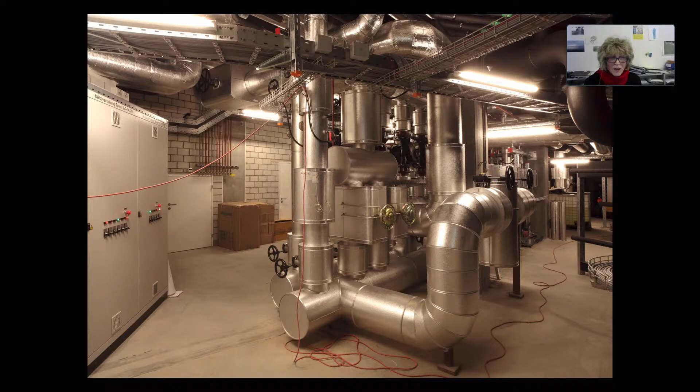For most of us, the image of these substances and types of energy manifests itself primarily through their appliances, containers, screens, and control equipment, pipes, ducts, tanks, lines, switches, intakes, and exhausts. We place them in the basement. We make them disappear in recesses. We cover them up, bury them in concrete, because their expression seems too arbitrary, too technical to us, and of course, most important, for reasons of safety.

Even less do we have a grasp of the carbon footprint that our buildings leave in the atmosphere, or more generally, our way of life. 40% of worldwide CO2 emissions are presumably caused by buildings and households for heating, cooling, hot water, electric appliances, etc. So my idea of architecture as a marriage between the Earth's crust and the atmosphere looks now less romantic, and the partnership has gone seriously out of balance.

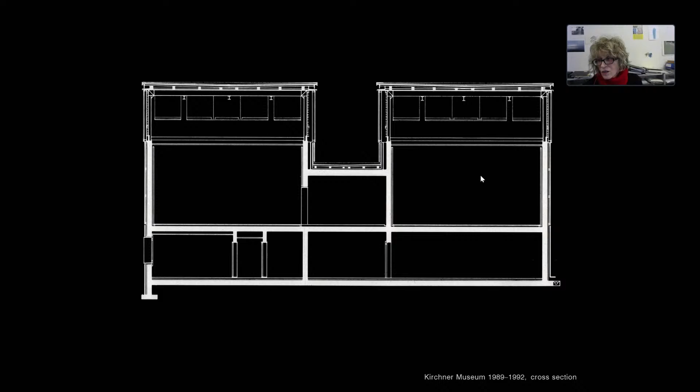We wanted to feature the new climatic building requirements then, and therefore revealed the construction of the wall, so the insulation panels on the opaque concrete walls of the exhibition rooms show through the etched glass. You can see this here. But the insulation, which was state of the art at the time, would now be twice as thick.

But for the first time, we used waste glass taken out of the recycling process on the roofs instead of the usual gravel. The recycling of used glass in Switzerland was then introduced in the late 80s, and it's still sparkling when you look on Google Earth at the museum.

A mostly closed, well-insulated building with a robust envelope and few openings for skylights and windows are the features to guarantee low maintenance and low operating costs for the museum Liner in Appenzell, because it's a private foundation and gets no subsidies. Today it's called Kunstmuseum Appenzell.

All the exhibition rooms are lit by north-facing skylights in order to avoid direct sunlight on the works of art. But the skylight in the entry space, the gathering space, is directed towards south, looks south.

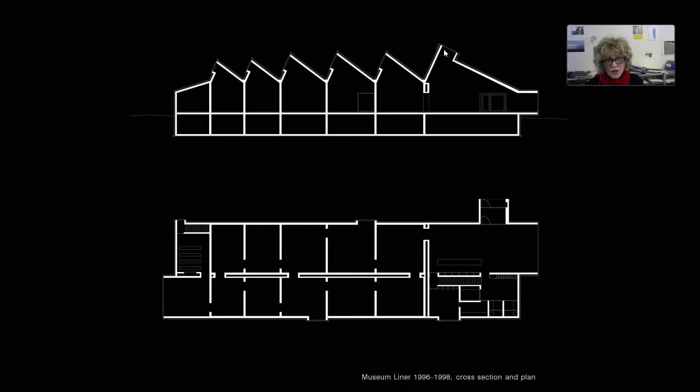The walls are made of load-bearing and insulated, aerated concrete blocks. This white material we call Ytong, the material you build single detached family houses with, cheap material, insulating. Additionally, they have ventilated exterior insulation clad with sheets of stainless steel.

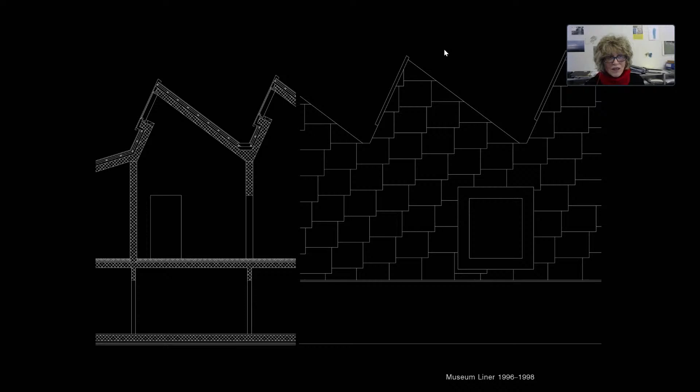It was the first building that we equipped with a brine water heat pump, and the parameters were really great at their time, but they're still good today. The total energy consumption of the building for heating, cooling, humidity regulation, lighting, hot water, and all appliances in the museum is only about 50 kilowatt hour per square meter a year.

But what about the embodied energy invested in the robust stainless steel facade? Yes, hopefully it may be written off, maybe amortized ecologically over many decades.

The subsidized housing development Brunnenhof was the first project where we met the Swiss sustainable building standard Minergie Eco. 2 buildings with 5 to 6 stories contain a total of 75 spacious apartments for families with 3 or more children.

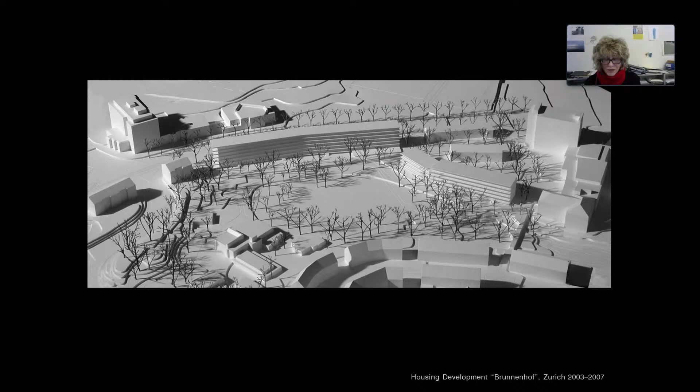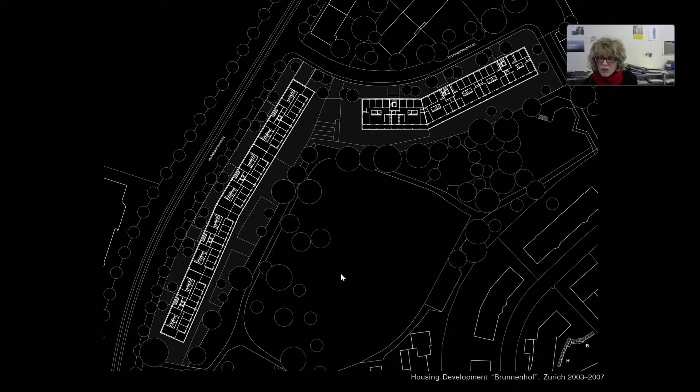The location is interesting and unusual. The back of the project faces a noisy street to the west, but the front looks into a public park with a small zoo. Only the kitchen faces the street, whereas all the other rooms face the park. The most luxurious space is probably a balcony which runs the length of the facade facing the park.

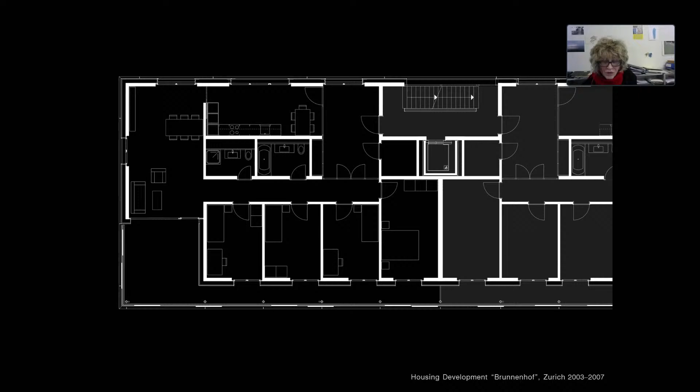Sliding panels of transparent and translucent glass serve as wind and sun protection, and they also screen the view from outside. They create a lively impression, together with the plants, furniture, toys, and laundry of the occupants.

The exterior cladding of opaque glass conceals a 20 centimeter thick layer of insulation, rock wool, and brick, and recycled concrete was used for the load-bearing structure.

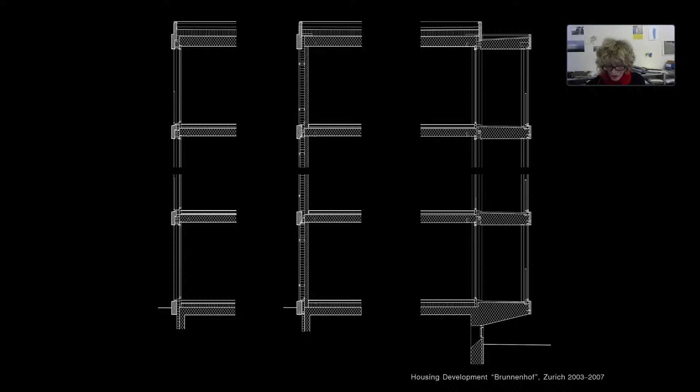District heating and warm water is provided by the nearby waste incineration plant. According to calculations, the building should consume only 25 kilowatt hours per square meter per year for heating alone.

The Swiss Museum of Transport in Lucerne welcomes its visitors with this new iridescent building, whose glass facades veil shiny scrap metal in the form of rims, propellers, ship screws, cogs. Just a few are from the museum collection. Most were bound for the scrapyard.

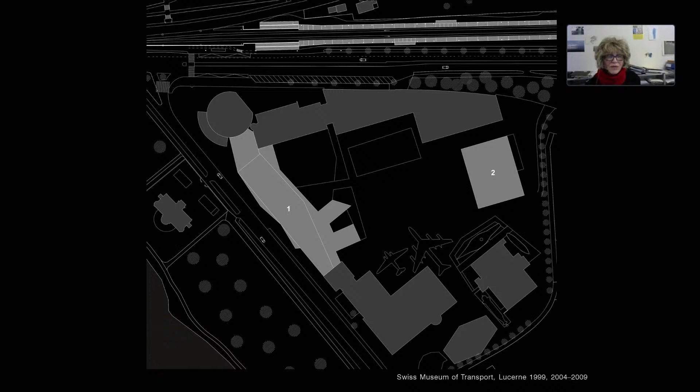This was building 1. Building 2. We considered also for building 2, for the road transport hall, using scrap metal. We studied the recycling of automobiles in Switzerland. First, the wrecks are pressed for efficient transportation. We proposed using these flattened bodies as cladding for the new hall.

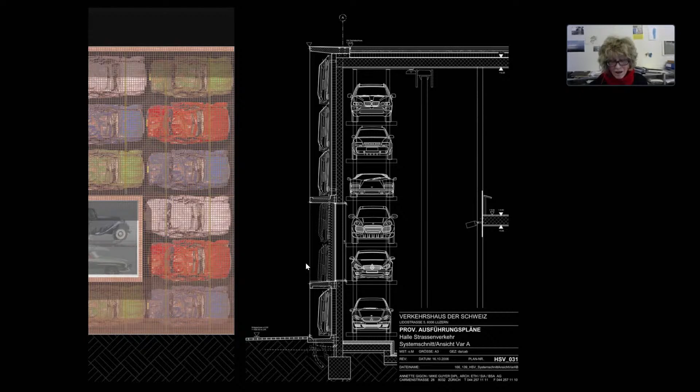We liked the juxtaposition: on the inside, the well-groomed vintage cars; on the outside, the wrecks that would be left to the ravages of time. The client approved the solution, but the automotive industry, as prospective sponsors, did not.

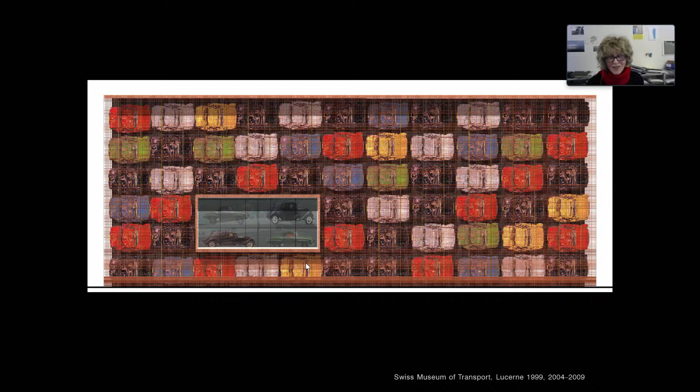A different solution had to be found. Road signs are also a source of scrap metal. We ended up covering the facades with used and new traffic signage, with duplicated ones, and also with some misleading signs of our own invention. We reversed the used signs that face the surroundings.

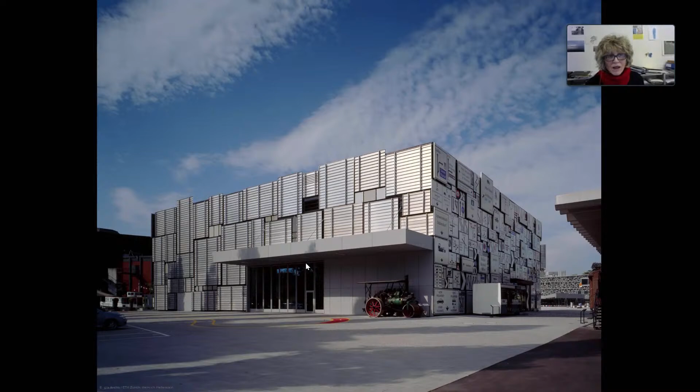The road transport hall was our first building to be equipped with a photovoltaic system.

A high-rise, like the Prime Tower office building in Zurich, has considerable urban potential. It can accentuate an emerging district like Zurich West. In spite of its height, it can communicate with the neighbors, with older industrial structures as well as new buildings.

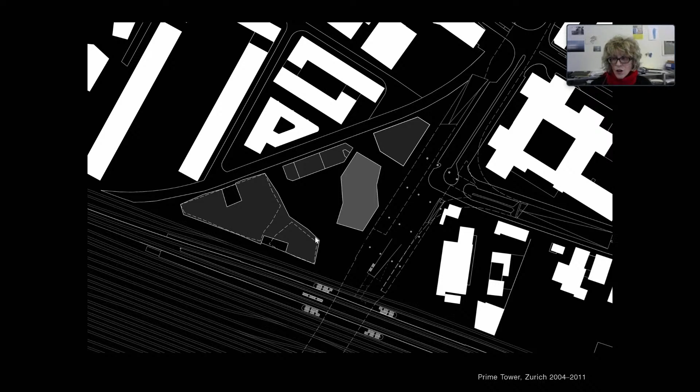By its placement and height, it can create public open spaces like the Marktplatz next to Hardbrücke station. This is the Marktplatz, and this is Hardbrücke station. And it can offer a view of the city from the public restaurant at the top.

It can play with the light and changes in appearance depending on the weather, especially when its facades are made of glass.

But what does a high-rise, notably a fully glazed one, have to do with ecology? Well, thanks to certain properties and measures, the building has in fact been awarded a number of eco-labels like Minergie, LEED Gold, etc.

And this is why the office high-rise has a large floor area. It's very compact, with 1,400 to 1,600 square meters per story. The total floor area is 3 times as much as the corresponding envelope surface.

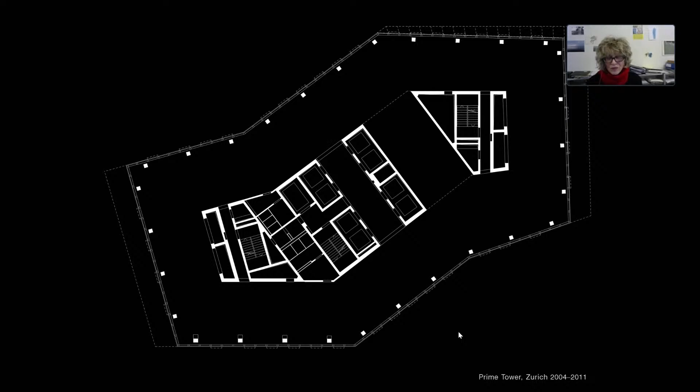And the facade panels consist of insulating triple glazing with low U value, medium light transmittance, and medium G value. The latter is further improved by inner, automatically controlled blinds.

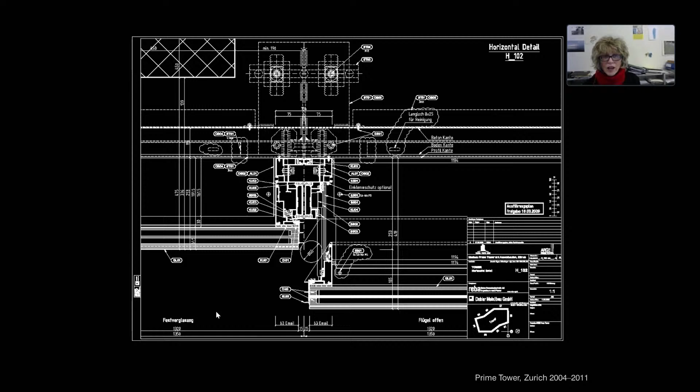And for the well-being of the occupants, every other window can be individually opened up to 7 centimeters during spring and autumn to allow fresh air, a ventilation function that can be centrally overridden when outside temperatures are too high or too low.

But is this user-friendly operating option maybe responsible for the great variations in heating and cooling demand among different tenants?

For the heating, the building uses mainly groundwater and district heating, only to cover the peak demands. And to its ecological credit, the building provides only 150 parking spaces for the 2,000 employees working there, because it's located next to Hardbrücke train station, as we heard.

But if the building had been executed as we had proposed it in the competition, with a ventilated double layer glass facade, would consumption values be better, or would we just see a higher share of embodied energy? Today, at least 20 kilowatt hours per square meter a year are needed for heating, and about twice as much for cooling. So around 60 kilowatt hours per square meter a year at minimum, which is not bad, but yeah.

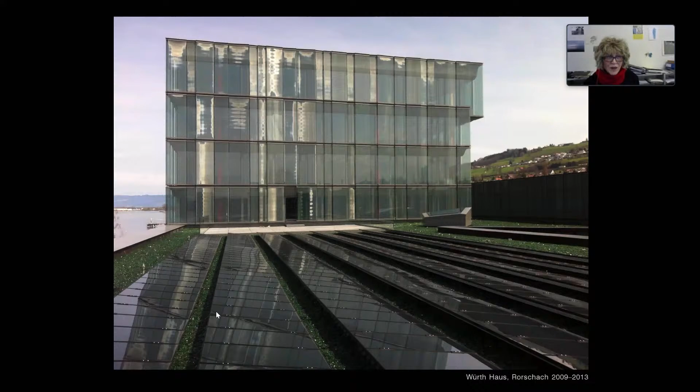This mesh reflects about 25% of sunlight without impairing the view from the inside. The panels are mounted at varying angles, allowing for ventilation of the interstice and also creating a play of light. The building not only plays with light, it also works with it: 2,000 square meters of thin film solar panels, photovoltaic panels, meet part of the electricity demand.

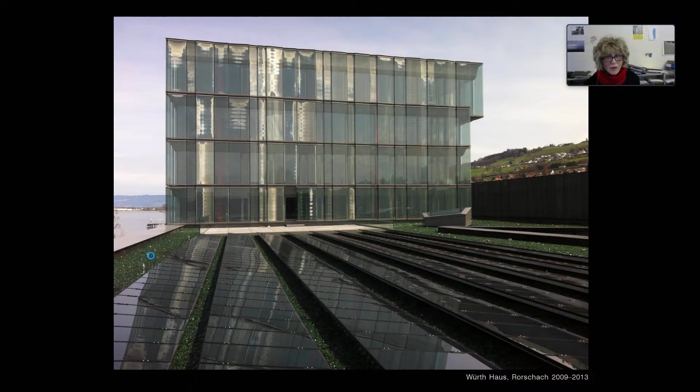Recycled glass was employed here again, green one this time. All the roof surfaces are equipped with solar panels, and the heating and cooling needs are entirely served by lake water.

And what about recent buildings? The housing complex Zollikerstraße features heating with ground source heat pump, 20 centimeter thermal insulation, triple glazing, but has large windows.

The office high-rise Andreasturm uses district heating from the waste incineration plant, parapets with 18 centimeter thermal insulation, triple glazing, and an outer glass panel, and sun blinds in the interstice, analogous to the Würth building.

The office building Claridenstrasse is heated and cooled with lake water heat pumps, supplemented with solar panels on the roof, 22 centimeter thermal insulation, triple glazing. But there are lots of windows, and for user convenience, individual operable ventilation flaps are installed that users may as well forget to close.

The residential building in Küsnacht has fewer window openings, 26 centimeter thermal insulation, but is still heated with natural gas.

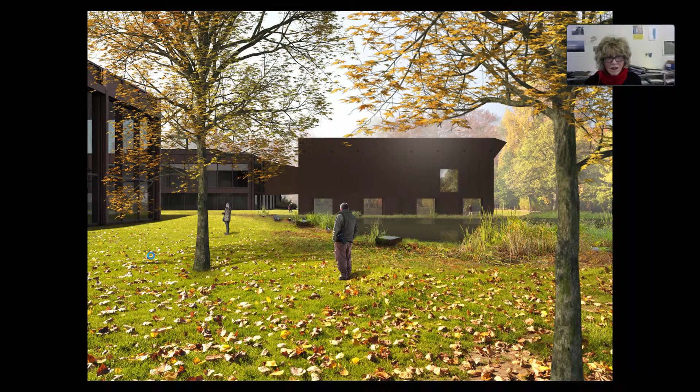It's very compact, has triple glazing, 26 centimeter thermal insulation, and is heated with district heating, but which is still produced with fossil fuel. The section with the sawtooth roof has its windows oriented towards north-northeast.

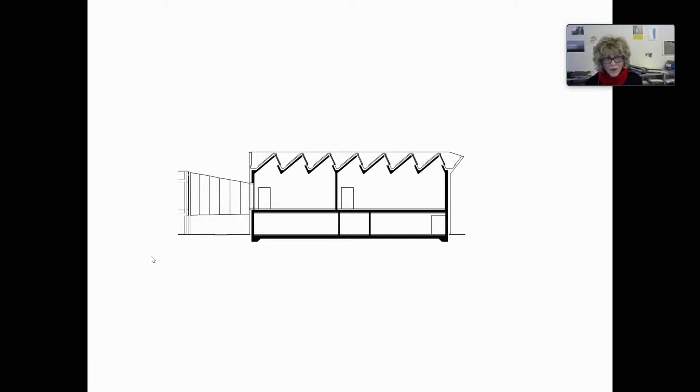On the screen, photovoltaic panels on the back of the sawtooth roof towards south-southwest were not part of the brief, not part of the program. So they will not be executed, but maybe, hopefully, in the future there will be a budget for it. Rendering from the back, the delivery entrance.

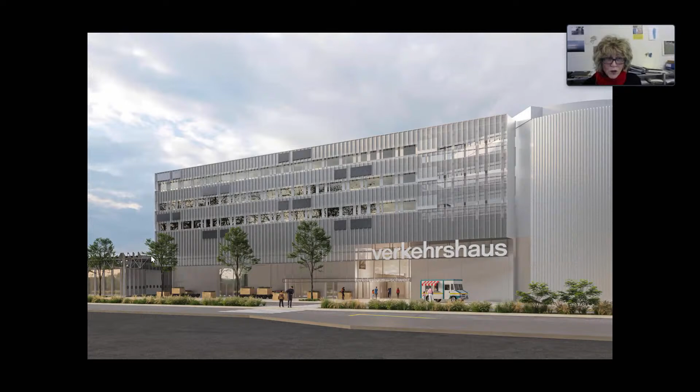A further building at the Traffic Museum Lucerne will be completed in 2023. It will serve multiple purposes, providing a second entry to the museum, huge exhibition space on the ground floor, 3 conference rooms and offices.

It will be equipped with 30 centimeter thermal insulation, with a thin perforated steel facade to absorb the street noise against the neighbors instead of reflecting it. It shows photovoltaic panels on the facades, a few only towards the north.

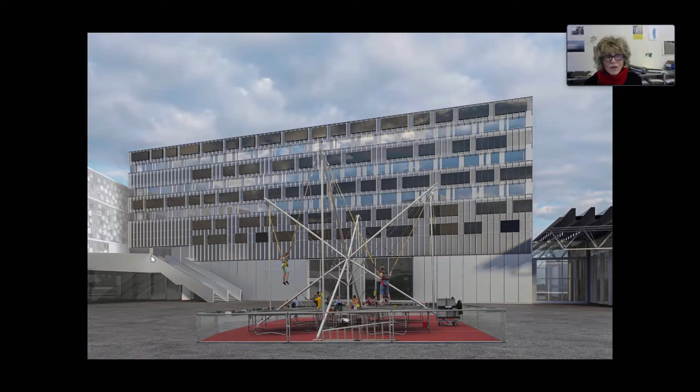More PVs, photovoltaic panels, are mounted towards the east and the south, where they can work more efficiently. Besides producing electricity, they also form a pattern on the facades, an ornament with the unpopular elements. This was a collaboration with Urs Beat Roth, an artist who helped us with this formulation of the pattern.

Of course, the roof is also packed with photovoltaic panels. Furthermore, the heating and cooling, not only for this building but for all buildings in the Traffic Museum, will be provided with a new heat pump in the basement of this new building.

But due to the difficult foundation on this terrain, and also the huge exhibition hall on the ground floor without posts, the building structure is mainly concrete.

Now, back in the exhibition in Berlin again, we showed student works from the semester 2019-2020 on the screen to the right. Let me show you the task.

During autumn semester 2019, material metabolism - in German it reads quite nicely, Stoffwechsel - the students were asked to investigate how multi-story residential buildings situated in a dense urban environment could be designed as zero energy houses, or maybe even zero emission buildings. Quite a target.

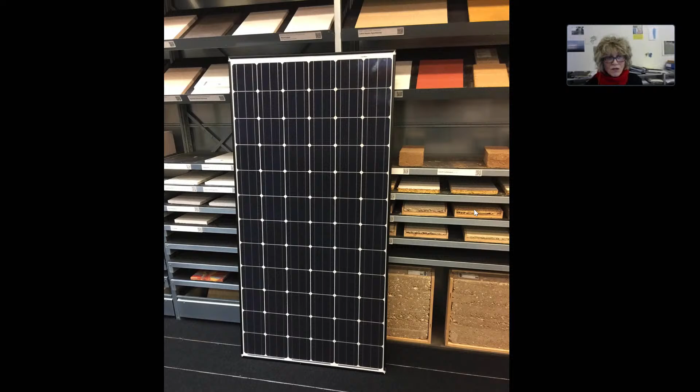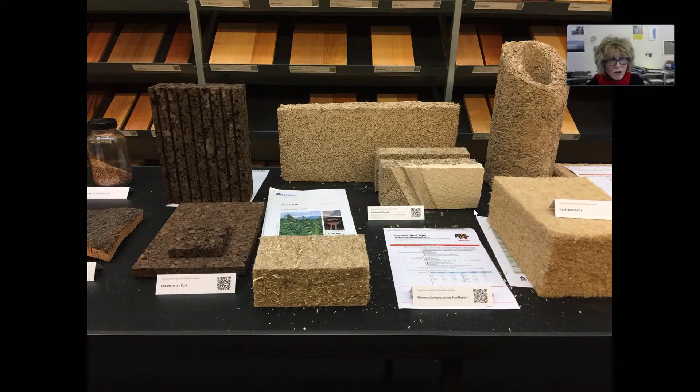The use and integration of photovoltaic panels in the design was an important issue, not an easy task and still unpopular with many architects and clients, including us. Aside from that, organic building materials like wood, hemp, and straw were to be considered as temporary carbon storage.

In the exhibition in Berlin, we showed several works. Let me pick just two of them. Both were designed for the site Birmensdorfer Straße, part of a perimeter block, which is occupied today by a setback building. Quite a nice one, I think, with access galleries on the back.

Student Moritz Dutli proposes remodeling instead of replacing the existing building. The single-room studios were developed into different duplex-type apartments. The present load-bearing structure remains largely intact. It's the black walls and the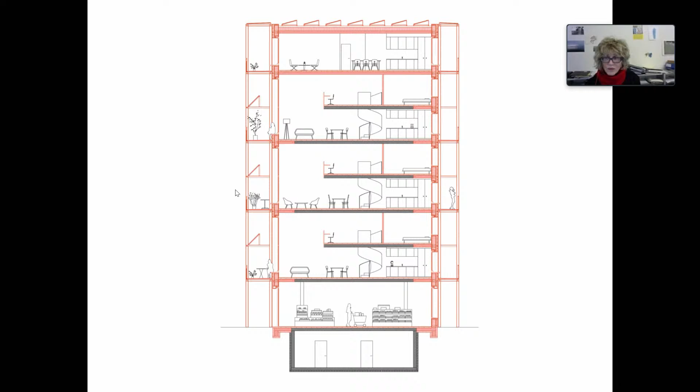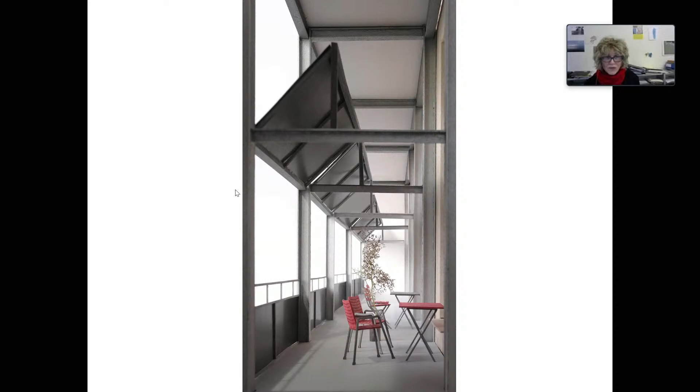and also a layer of balconies towards the street to the south. On the double high loggias, photovoltaic panels form parapets as well as sunshades, kind of brise-soleil. The added metal racks also protect the new wooden facades. And the street line of the block is re-established, although in a different way.

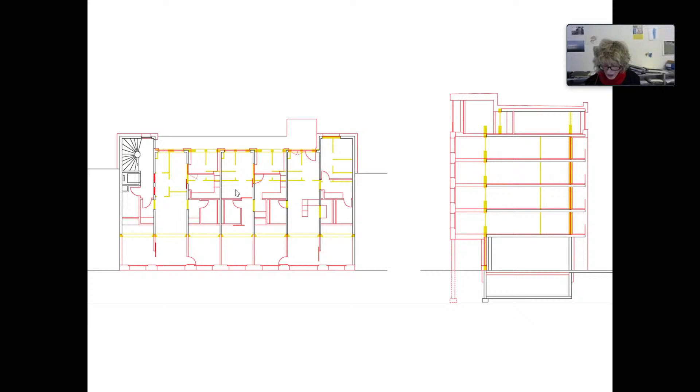The student Tim Vogel also worked on Birmensdorfer Straße. He extended the existing volume towards the street in the south. The former single-room apartments are connected to form larger units now. Facing the courtyard, they each have a small private open-air space as part of the access gallery.

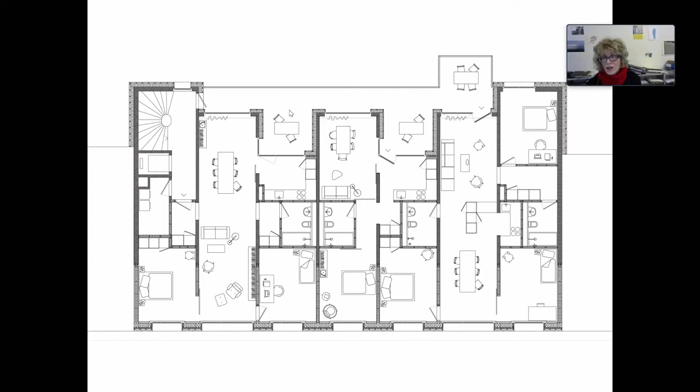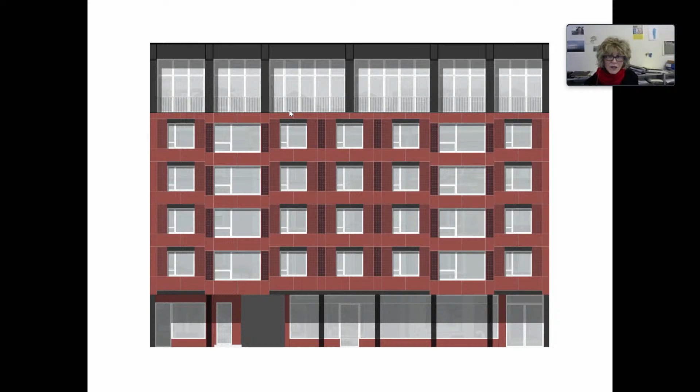The street facade to the south consists of various solar panels. Monocrystalline photovoltaic elements of different sizes receive a red color coating, but in various intensities. So dimensions and degrees of transparency are matched to generate compatible voltages so that the modules can be efficiently connected in series. This is the potential, and

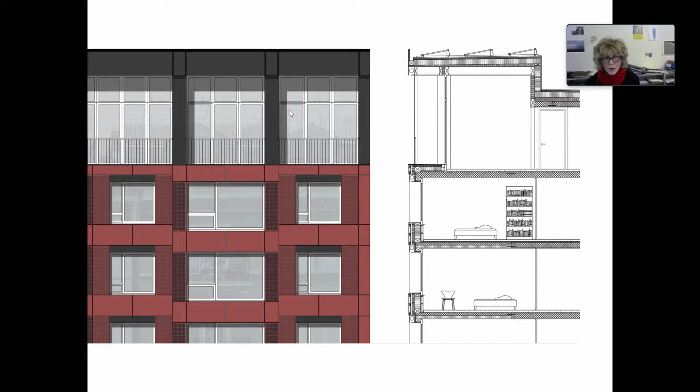looks quite nice. It forms a subtle play with these dimensions and visibility and masking of the PV elements. They make together for a very convincing facade. Kind of invention.

Well, and in the center of the exhibition on the white screen, there was room for statements, questions, and doubts. Buildings that require little or no external energy for heating or cooling, buildings that generate energy surplus, buildings that act as carbon sinks.

Yes, this is feasible today. But having learned more about this topic, we would now rather say buildings that act as carbon deposits for a while.

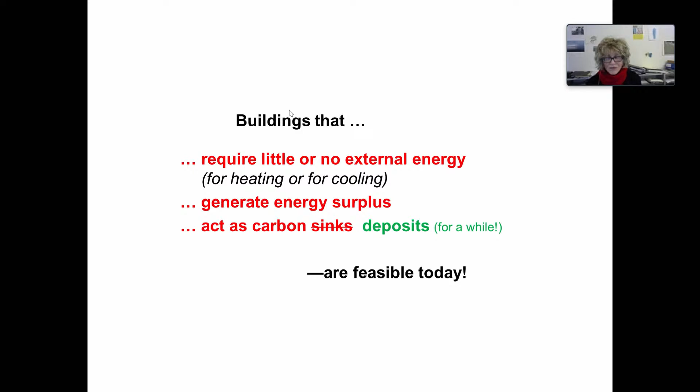Now, this is how this can be achieved: with more thermal insulation, with brine water heat pumps, with photovoltaics, solar thermal energy, with wood as construction material, not a fuel, with less window area, with recycling, upcycling, without oil, without natural gas, without coal. All that and more is well established and tested.

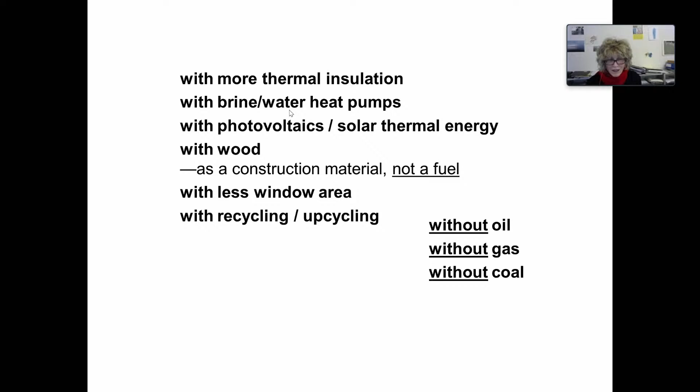But we still have questions about the balance between operational and embodied energy, about greenhouse emissions, including production, transport, and disposal across the whole life cycle. The subject is highly complex, and the greenhouse gases are invisible. Lots of data, facts, and figures are available, but dealing with them is a time-consuming Herculean task for each project.

We urgently need comparable numbers, measured values, parameters. We need clear, user-friendly tools, that is, standardized but location-sensitive greenhouse gas calculators. And yes, all of us need to increase our literacy in terms of climate and energy.

Since then, we try to dig deeper in the complex field of energy consumption and greenhouse gas emissions. Also, we try to get deeper also in the field of our beloved materials. We try to become more informed about the life cycle analysis of building materials, with unexpected results.

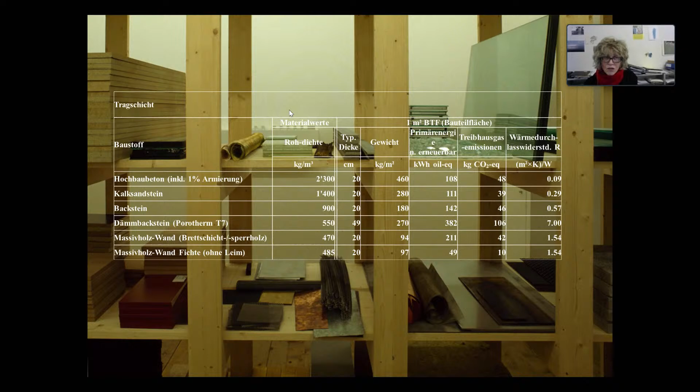In the autumn semester 2021, we repeated and expanded the 2019 concept. The preparation resulted in a 300-page reader and in a vademecum to keep useful data handy. Well, this is how they looked.

Besides the reader and the vademecum, with quite some facts and figures on energy, primary energy, embodied energy, and greenhouse data, besides talks with professionals and scientists, besides tracking current newspaper articles on the climate issue, we installed an ad hoc exhibition at the Architecture Library Material Hub at ETH.

An exhibition which showed materials in relation to the numbers—the numbers on embodied energy and greenhouse gas emissions per square meter, which students calculated.

For the design task, the students could choose one of several existing buildings in Zurich, office buildings mainly, and older than 50 years.

The buildings should not be demolished, but be converted and extended into mixed-use office buildings, housing and office buildings, a combination of both. The combined operational and embodied energy consumption, as well as the greenhouse gas emissions, should be reduced to a minimum

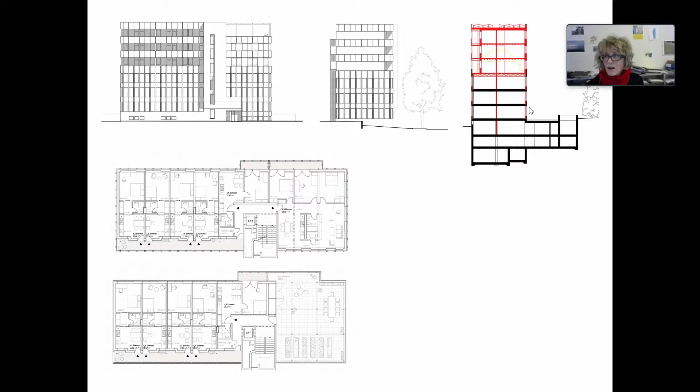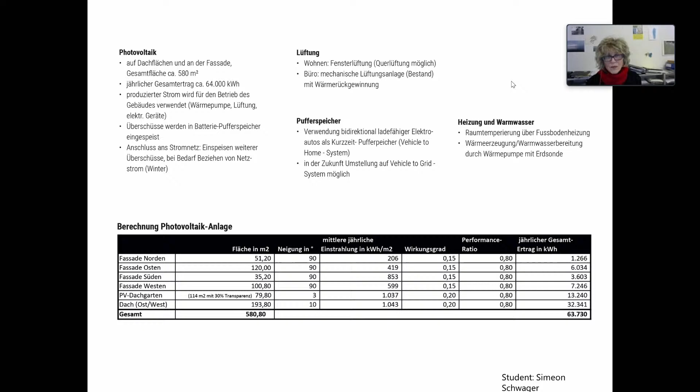The section shows the extension together with the facades and the ground plan of the apartments on top. This was the addition. All of the students calculated the energy yields of the photovoltaic system, the future demand of operational energy for heating, warm water, and electricity, in comparison with the photovoltaic energy yields and the invested embodied energy.

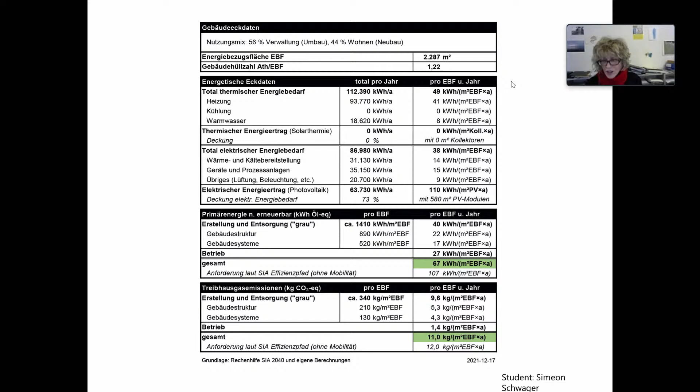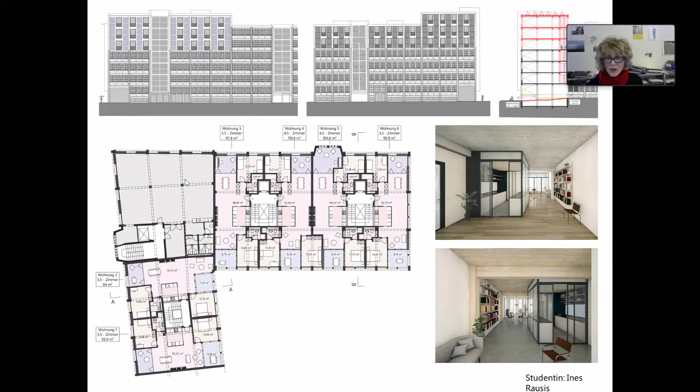A former warehouse on Badener Straße, today used as an office building, was to be transformed into a skeleton building. The student Ines Rausis added 2 to 3 floors and used photovoltaics on the facades. The floor plan shows new staircases to access the 3 new apartments. Only the northern corner towards the street, where the offices were maintained, was kept, along with the staircase.

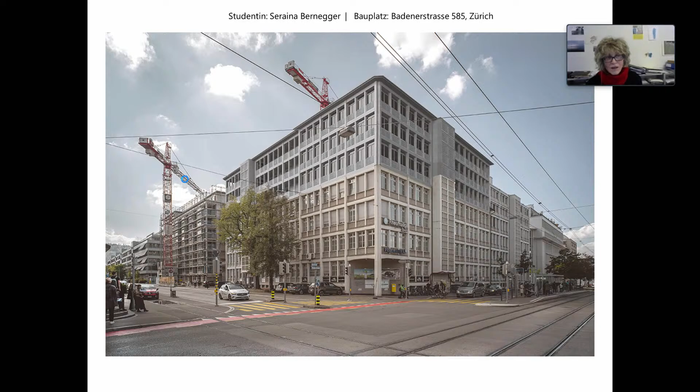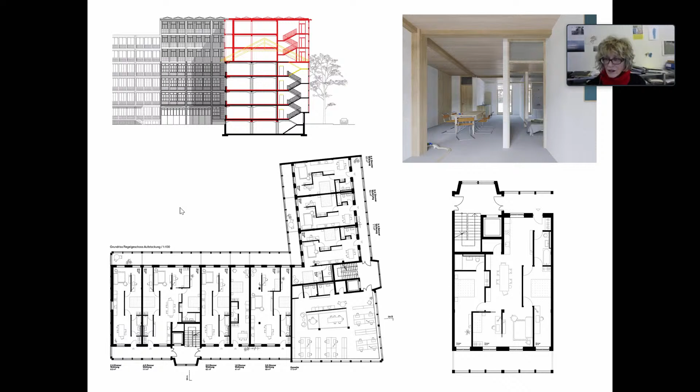The student Seraina Bernegger added 3 floors. This was possible because it was a former warehouse with a lot of capacity in the structure. She found a solution with photovoltaic glass bricks for the parapets, and the interesting ground plans in combination with the section, with access galleries and balconies, formed a very convincing solution for the extension of the former warehouse. This was quite a nice work she did, with many possibilities to use the ground plan.

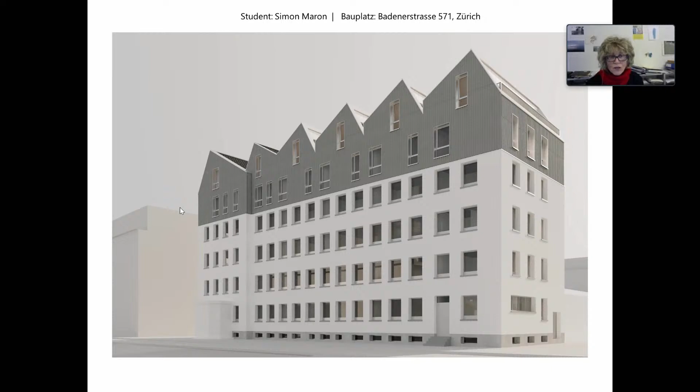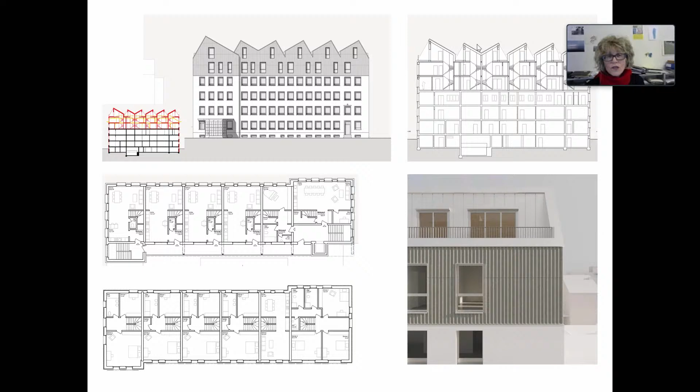On Badener Straße 571, a brick office building from the 40s had to be extended with housing usage on the roof. The student Simon Maron added 2 stories to create 6 maisonette townhouses on top of the building. To do so, he included one of the existing stories. The roof is formed as a sawtooth roof, including terraces to allow privacy and shelter from the busy street, as well as more surface for the photovoltaic modules.

The elevations show an interesting differentiation of the facades: industrial looking towards the busy street, and like a row of elevated terraced houses towards the south. Here the photovoltaic panels form sliding shutters or are fixed to the wall.

You might have realized the semester was not about iconic architecture. Instead, it was about competent, careful handling of existing building fabric and its retrofitting and transfer into the future—a future without fossil fuels, a future where living and working may move closer together. Nevertheless, the skillful balance between old and new is an art in terms of energy and greenhouse gases, with regards to functions, and in terms of design. The 30 students got quite far with their projects, in my opinion.

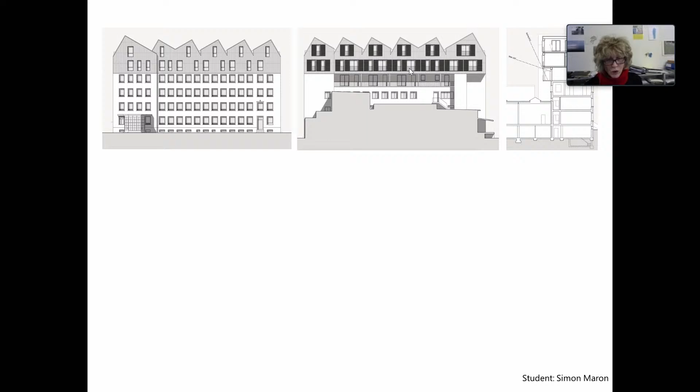Let me end the lecture with a quotation from Luce Irigaray. She wrote in 1983 in L'oubli de l'air.